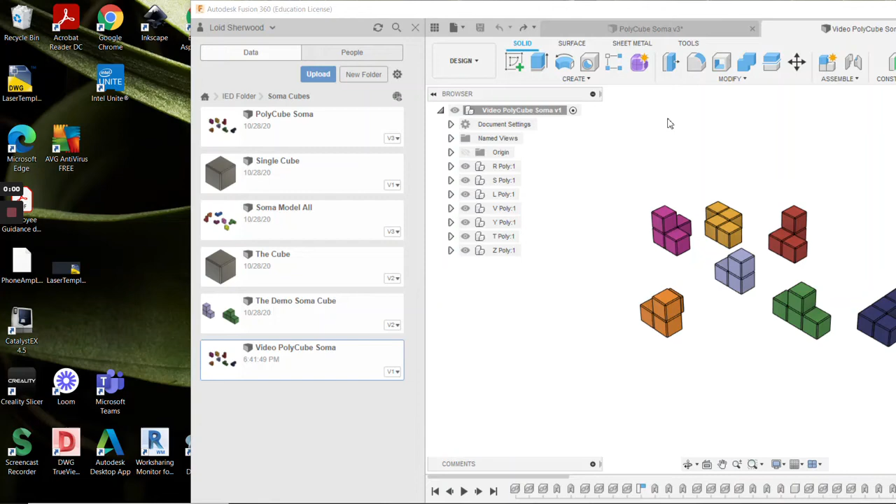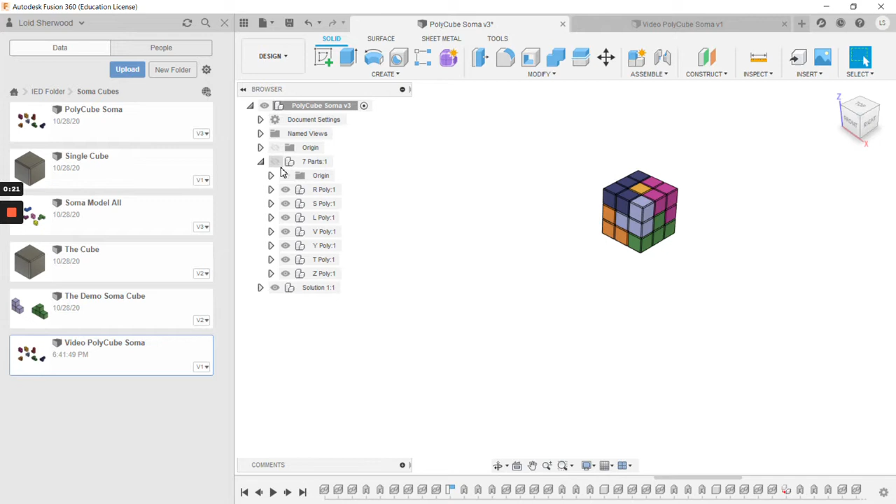Okay, we're going to go through a procedure to assemble your 7 parts of the Soma cube into an assembly. So what I have here is a model, and I'll show you this in a moment how we set this up. I have my 7 parts here unassembled - I actually put them all under one component. And then I have my assembled cube right here.

So I can turn that on and off, or I can turn these on and off. I'm going to show you how we set things up to do that first.

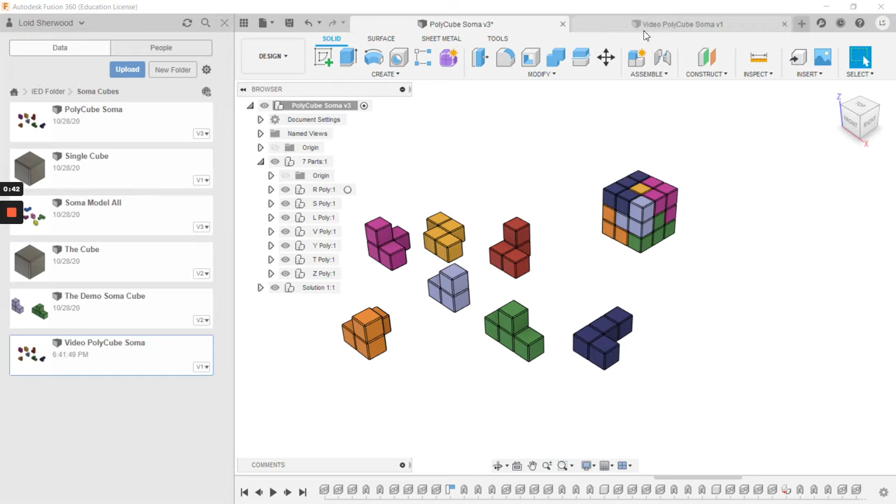So I'm going to go to this one here. This is just like I have my 7 parts, and I'm going to make sure this is on the primary up here. And I'm going to create a new component, and I'm going to call this one 7 parts. New component. I click OK.

And then I'm going to select each one of these parts and just move them into that model. So now they're all under here. And I can just click this one on and off, and I can do that.

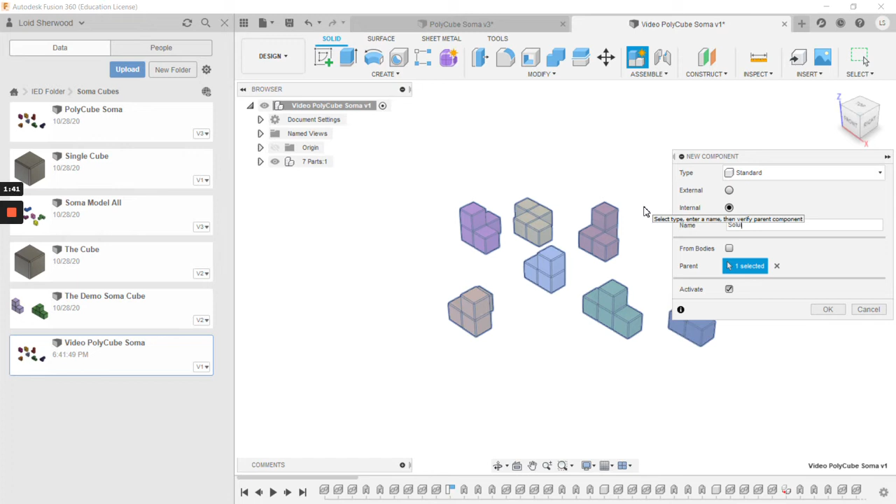Now I'm going to create another new component. Make sure this is the primary up here again. And I'm going to call this solution 1. And click OK.

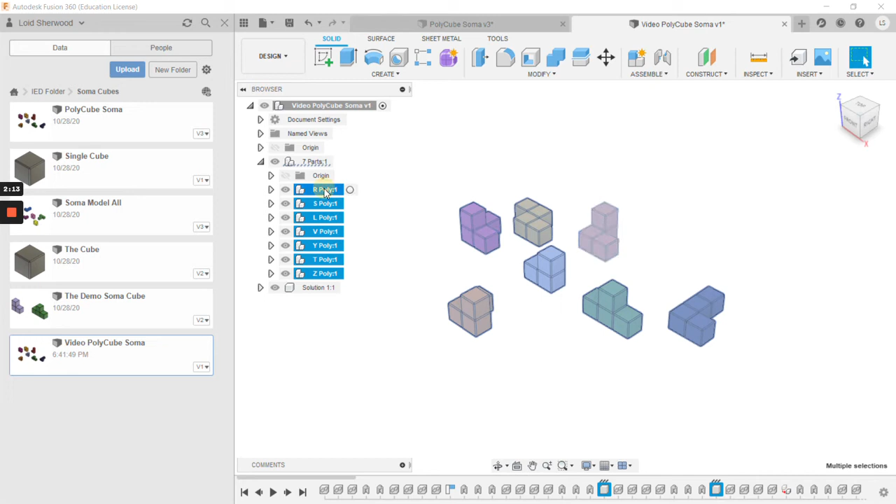I'm going to still go back up to the main parent or primary right there, turn everything on. And then I'm going to actually come here back to my original 7 under the 7 parts component and select each one.

Right click. I selected each one by holding down the shift key and clicking on each one. And I'm going to copy those, and then I'm going to go to this solution 1, right click, and I'm going to paste - don't paste new. I don't know if it matters particularly in this model, but right now that's the practice that we're going to do, so I'm just going to hit paste.

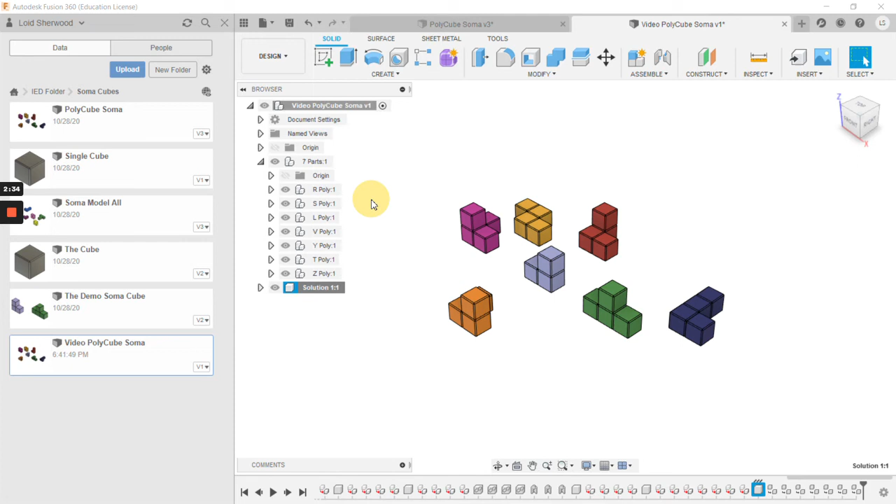Now when I go to paste it, it's pasting on top, so I'm just going to move it over here out of the way, take that area over there, and click OK. Now I have actually 2 sets of 7, and I can turn off my original like this.

And in the next video, I'll show you how we go about assembling these - actually, a few parts. I don't think I'll make a full video of all 7 parts, but I'll show you how we manipulate these to assemble them.